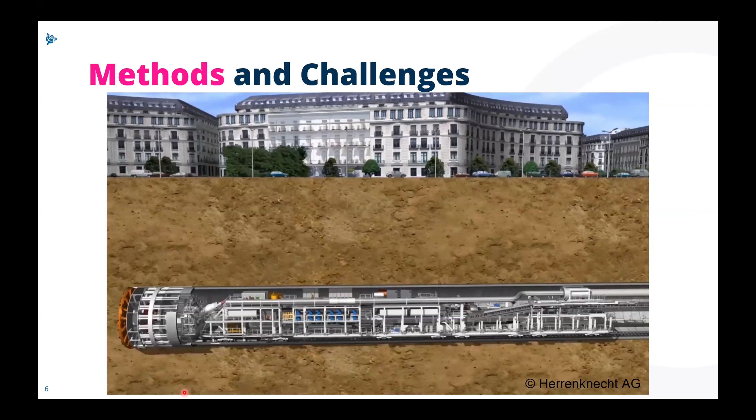Not everybody knows how a tunnel boring machine works. So here's a nice short animation from the manufacturer of tunnel boring machines, Herrenknecht, which is actually the mother company of VMT. The majority of these tunnel boring machines also have the VMT system on board. Just to get a little insight here, this is a 12-meter machine, 40-foot diameter, excavating through the ground.

It's a little bit like a little factory. What happens here: the cutter head in the very front of the machine is turning, excavates the material, the material gets extracted from the underground while the machine is pushing forward. And then behind the machine, you're building these called rings with precast tunnel segments.

And for sure, think about a subway project. You need to put a track into the tunnel, and you need very tight tolerances. That also means it puts a lot of pressure on the surveyor - not just when the machine comes out of the ground for breakthrough, where everybody's waiting and the surveyor's heartbeat is the highest, but also while you're tunneling, you always want to ensure the machine remains properly on line and grade.

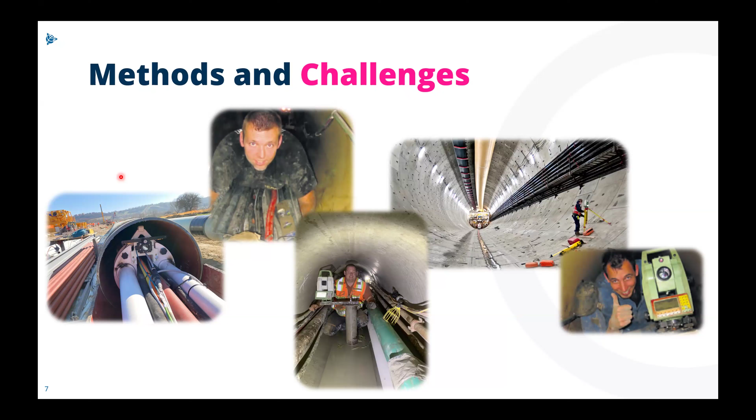We have sewage tunnels, 4 foot, 1.2 meters ID, and then up to 500 meters, 1,500 feet long, or sometimes even longer. So contractors also like to push the limits. The machines can do more and more, but what can you do as a company to not just keep the contractor happy, but also keep your own people happy, so that they in the future don't need to crawl into these tunnels anymore, because it's also not getting easier finding the people to do this work.

A little bit of background about VMT. As I said, over 30 years now, and I am working in the US taking care of the business here. We have a group mainly focused on tunneling projects, but at the same time we have a metrology team that's also involved with car manufacturers, airplane manufacturers. I call them the sub-millimeter team because they work with laser trackers and have to work with sub-millimeter accuracy.

This is not necessarily needed in tunneling when it comes to the TBMs, but there are precast segments being used which in tunneling have tight tolerances, where our team from metrology is also involved.

Different methods, as I mentioned - TBM tunneling, micro tunneling. Micro tunneling doesn't always mean just small diameter, it's just the method of how you tunnel. You can have a 4-meter micro tunnel machine, for example - that's not a micro tunnel in terms of size, but in terms of the excavation method.

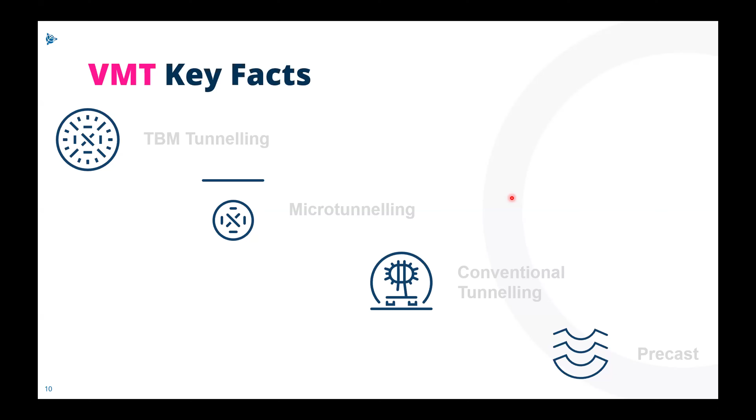And then there's conventional tunnel. Conventional tunnel can be one where you use a shovel. It's still happening that people excavate with a shovel for some short tunnels, because it's the most economic one, but there are other methods - drill and blast, or excavator, or roadheader.

Just a little bit about milestones - I won't go into detail, but we have a pretty good track record with more than 3,000 projects around the world. When it comes to guidance systems, if you're wondering how these systems work, we are basically the Google Maps of these tunnel boring machines. There's no GPS. So how these systems work, I'll show you a little closer in the next slides. But it's not just about the TBM itself, it's also about what's happening behind the TBM.

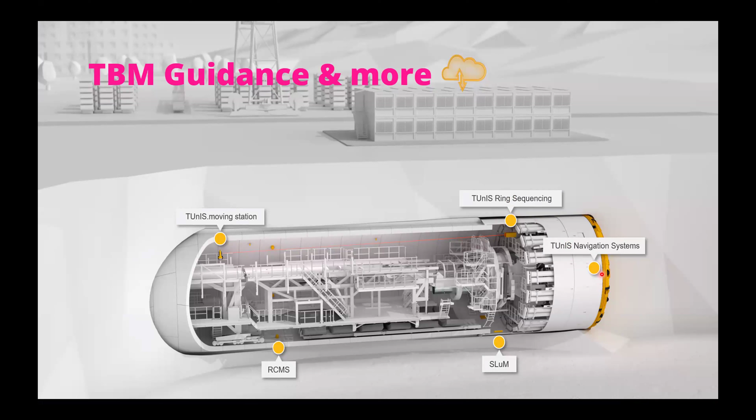Is there any deformation of the tunnel? So we have solutions for this too. And then there are other parameters of the machine that need to be monitored.

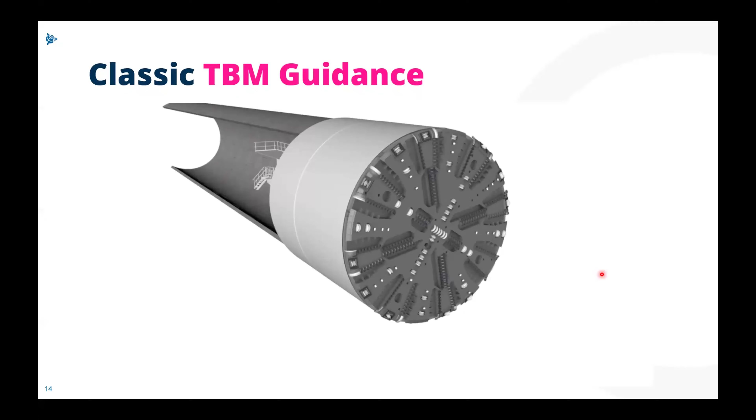So this is a nice animation that shows you how the guidance system works on the tunnel boring machine. It's a total station-based system. The total station is mounted on a bracket in a fixed position. You have a backsight target, and then there's what's called a laser target sitting in the machine. You know the location of this target, and based on these measurements, you can determine the position of the machine.

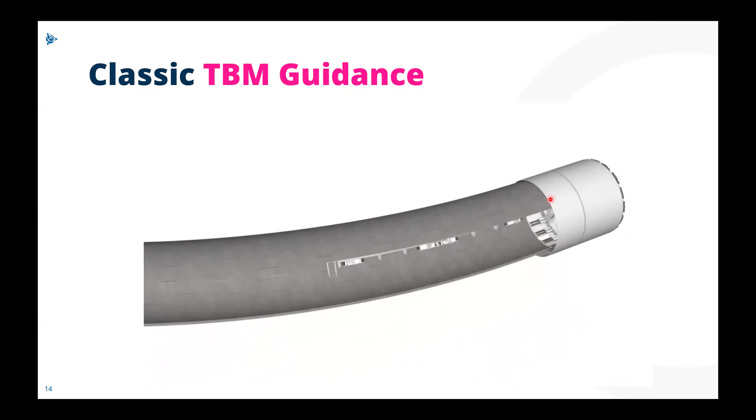And not all tunnels are straight - we have curves, we have slopes. So we all need to take this into consideration when it comes to using the guidance systems.

So a closer look here at a guidance system, call it the classic, where the Leica total station is sitting on a bracket mounted on the tunnel wall, on the precast segment. Here is the laser target unit that's mounted inside the machine.

Here you can see an operator using the VMT system. The operator has a lot of screens, not different TV channels like in the pubs where you see different sports shows at the same time. The operator needs to monitor parameters on the machine, and at the same time have a look at where the TBM is going relative to the designed alignment. There's certainly development toward automating the TBM operation in terms of steering, where we as VMT also contribute to the automation.

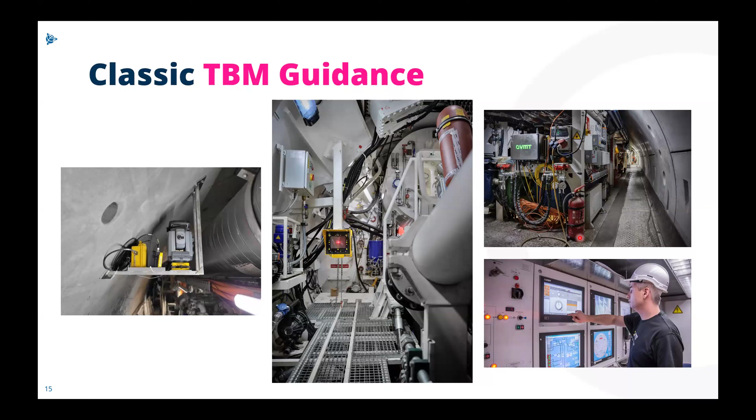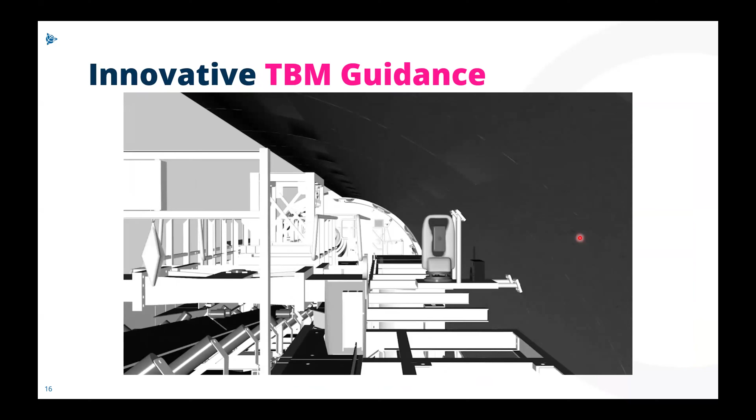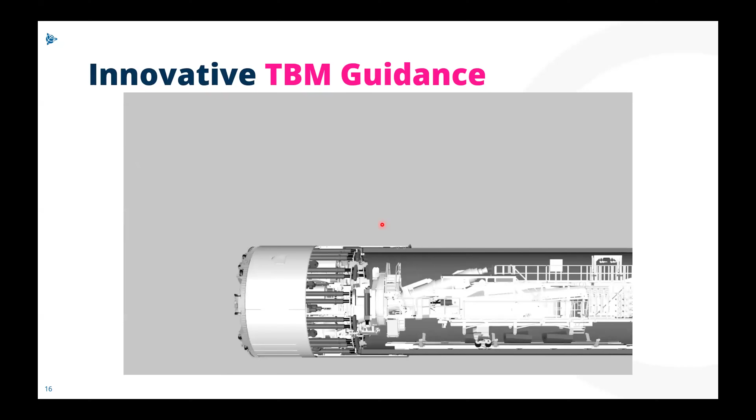Remember, we had the tunnel bracket on the tunnel wall. We also found a different solution for guiding a TBM, a more innovative solution: the moving station, moving the total station away from this fixed bracket and putting it on the actual machine. Then with resection, we get the coordinate of the total station. We have several backsight targets on the tunnel wall, and then measure to the actual target on the machine. You might wonder, how does the total station stay leveled?

For this we have a self-leveler. This is the self-leveler we used in the past. We have now developed our own self-leveler, a smarter one because it also has an internal inclinometer. It gives you direct feedback about what kind of movements you have, so you can analyze better and utilize this information. Also, if you have vibrations on these machines, there's better detection of potential error sources.

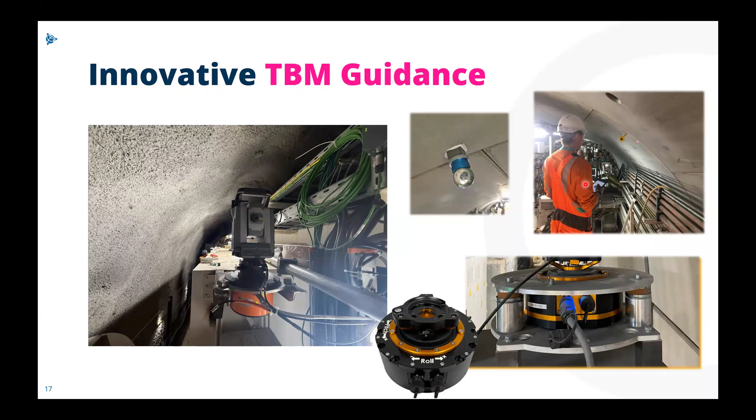The good thing is the surveyor or engineer can use an app on a tablet to control the total station through the VMT system. There's no need, like in the past, to run back into the operator's cab and control it from there. This simplifies the workflow, makes the work easier, and helps with troubleshooting.

So this is what it looks like in the operator's cab again. We're also trying to take these parameters from the machine now. It's not machine learning exactly, because the TBM isn't necessarily learning, right? Machine learning is the phrase used for a lot of topics, but we're trying to get more parameters from the machine that we can incorporate into the guidance system to also calculate the TBM position without, for example, the total station.

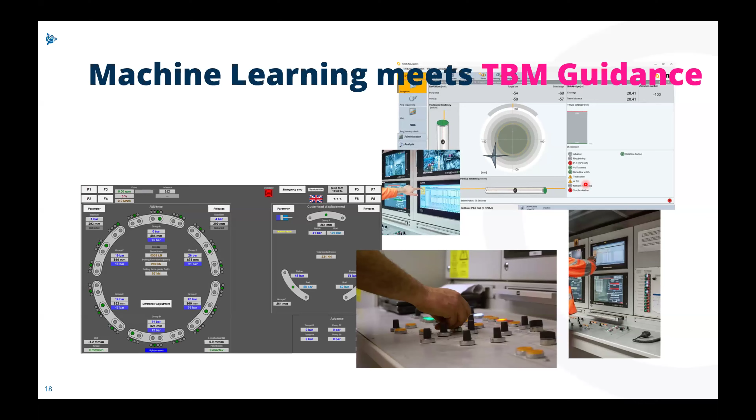For example, if there's no line of sight between the total station and the target, we can still continuously give a position to the operator. We don't want to fully exclude the total station, but we want to ensure we always have a permanent position for the operator, especially in critical areas along the alignment. Imagine going from a tangent into a curve - you want to make sure the operator always has the position available at all times.

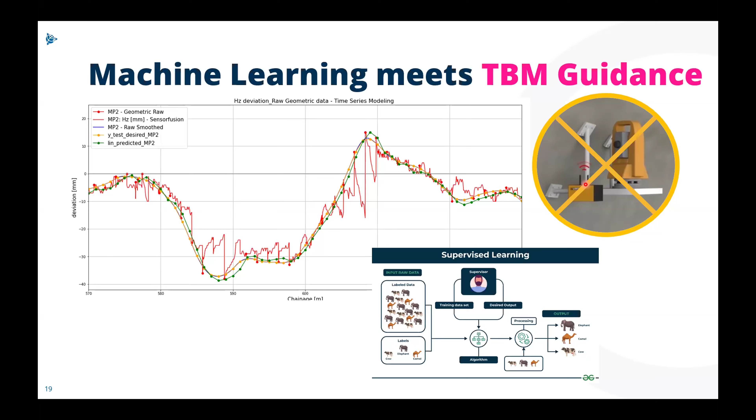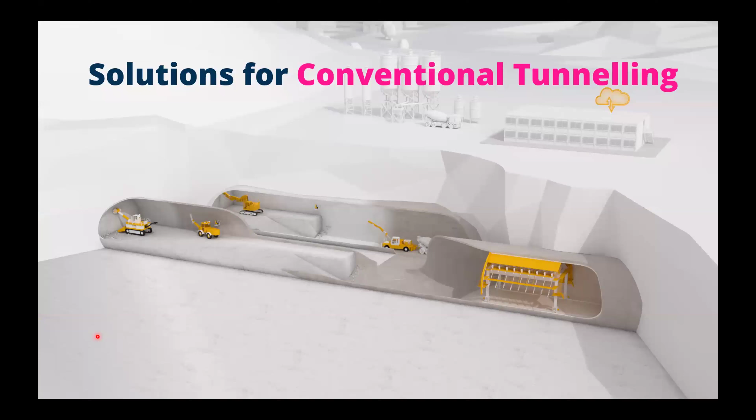So this was a little bit about TBM tunneling, giving you some insight about what's happening with tunnel boring machines. But there's also conventional tunnels where you excavate with a road header - this machine - or with an excavator.

With a TBM you never see the face, the very front of your excavation. In conventional tunneling you always have direct access to the face, which means safety plays an even more important role here, because people are more exposed to the ground and the geology.

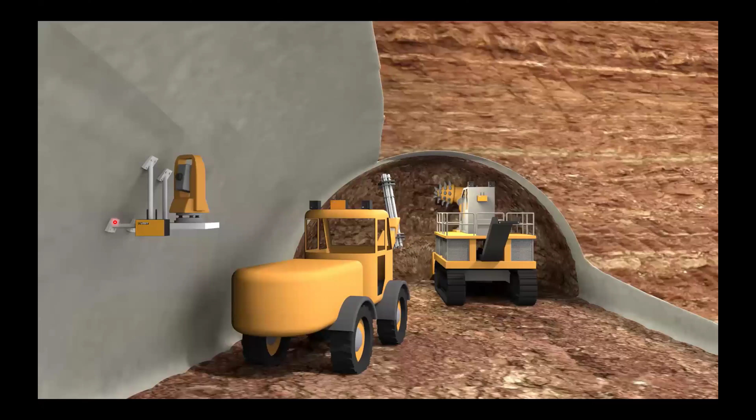In this nice animation, you can see how a total station is used on the road header. You have two prisms mounted on this road header machine, and we know exactly where these prisms are located relative to the center of the machine. So you have a local coordinate system, and the boom in front moves left, right, up and down. We calculate this position continuously relative to the profile they need to cut.

Cutting the profile here is critical because you have tight tolerances - the more you overcut from your profile, the more shotcrete you need to use, and the more shotcrete you use, the more money you need to spend. So you want to stay within tolerances and be as precise as possible.

The total station can also be used at the same time for the rock bolter, which reinforces the ground. The rock bolts also need to be documented in terms of their position - how they were drilled and where they were drilled.

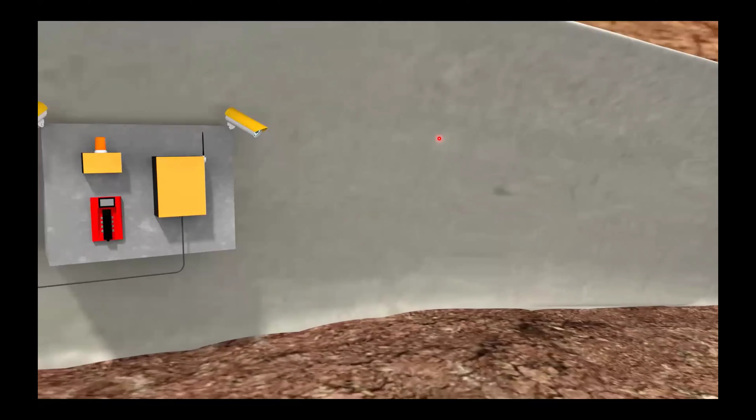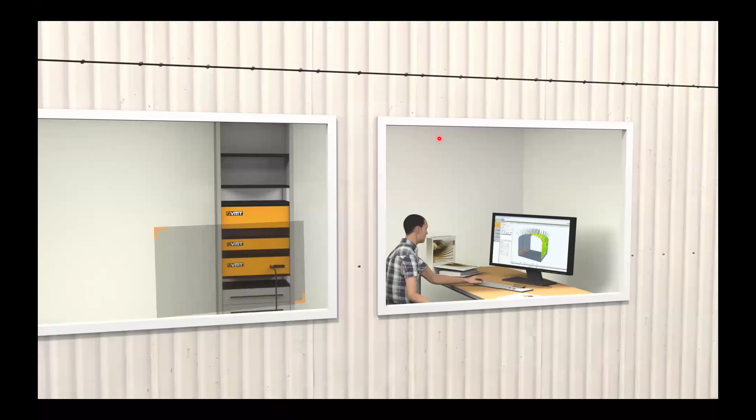The data don't only stay in the tunnel, they're also getting transferred to the surface so that it can be accessed by different stakeholders on the tunnel project, for analysis and also for configuration on the surface. Since the surface is very well connected on most jobs with the underground, you can also do your configuration on the surface and transfer updates directly onto the machine.

There's no need for people to take a pen drive, walk down, wait for a man basket to be lowered into a shaft, and then walk another 2 kilometers to a machine to update the data. This can be done directly in real time from the surface, which is absolutely great. It also makes the surveyor's life easier, because surveyors have a lot of other topics to do, and you don't want to spend several hours just walking to a machine to transfer data.

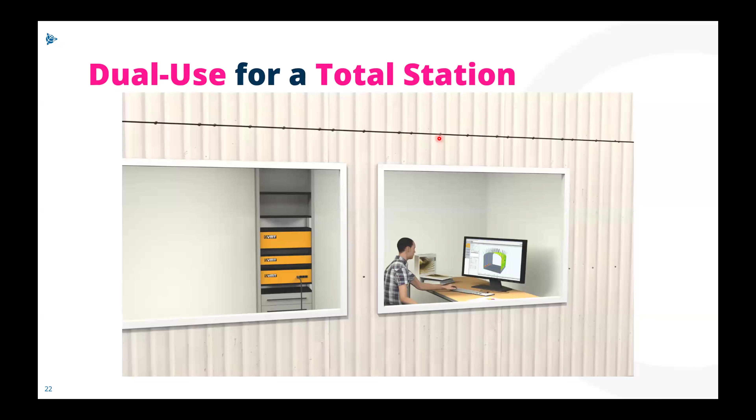As mentioned before, we're trying to share the total station for different applications in this conventional tunnel. It really depends on what is being used here. Since you have one combined system from VMT, the systems can be used on different machines, which simplifies the process because these machines can directly connect to the total station, since they're normally not all working simultaneously, it's a cycle of how they work. You start with your excavation, and you maybe have your rock bolter, so whatever machine is close to the face will use the total station mounted on the tunnel wall.

With the shotcrete rig, you use the total station to georeference the scans so that you have a full georeferenced scan which can be compared to the design. That's quite important for the shotcrete application, because you need to see exactly what was your excavated ground, where you've overcut or undercut, and where you need to apply more shotcrete to be within your tolerances. It's not just about the thickness. Some jobs also use the shotcrete as their final lining, where it becomes really important that you stay within the tolerances.

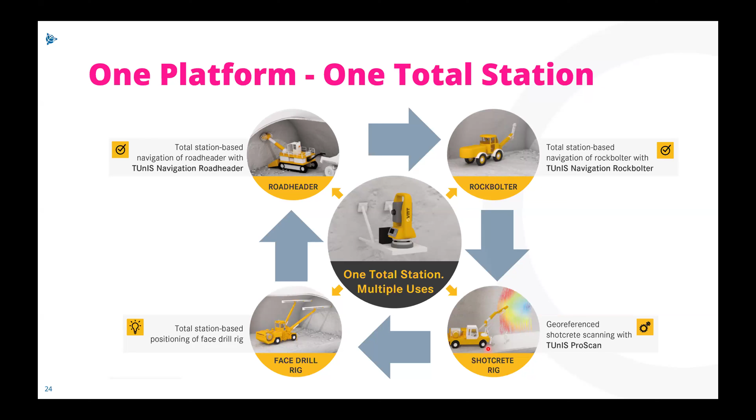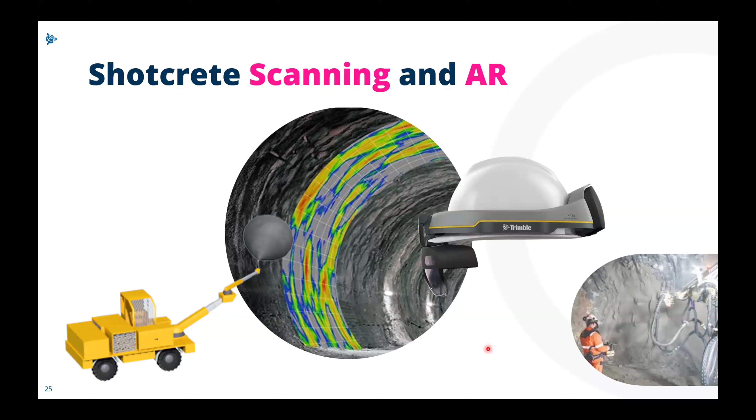We also did some use cases with the Trimble HoloLens, where we try to visualize the results of these scans onto the HoloLens. Unfortunately, Microsoft will discontinue this product, which will also result in a change for us, so we'll see what comes after. But it's an interesting case for an operator, that they can wear the helmet and see in real time, by turning their head, where to apply what type of or how much shotcrete based on the scan results.

Shotcrete is one option for lining in tunnels. Another option is using formwork. Some jobs are struggling, like these 3 people here, to place this formwork in the tunnel relative to the design. This can be quite an iteration, a long process, sometimes of going back and forth between measuring, getting the results, then deciding how much you need to move this formwork left, right, up, or down.

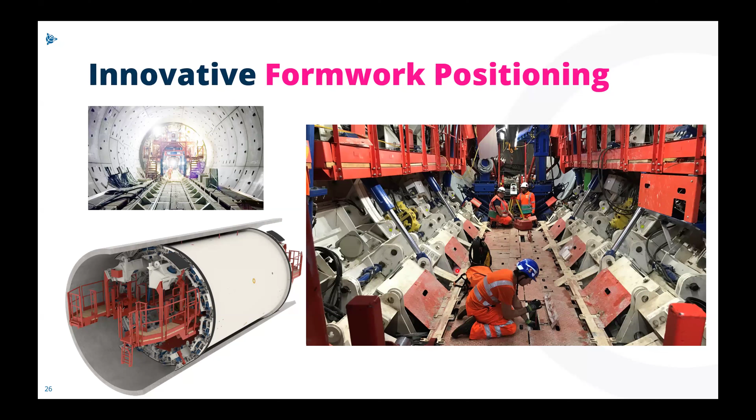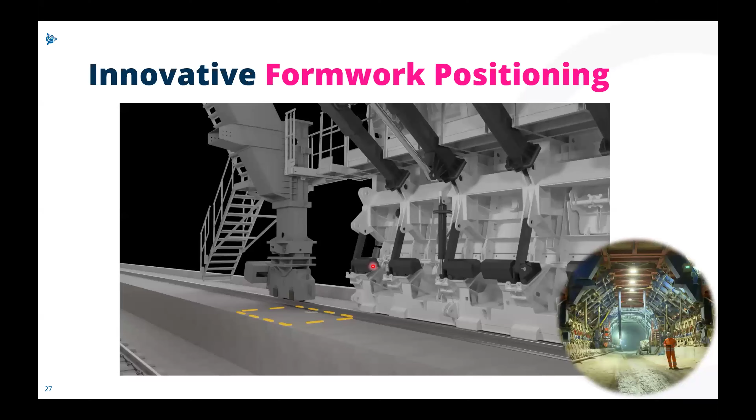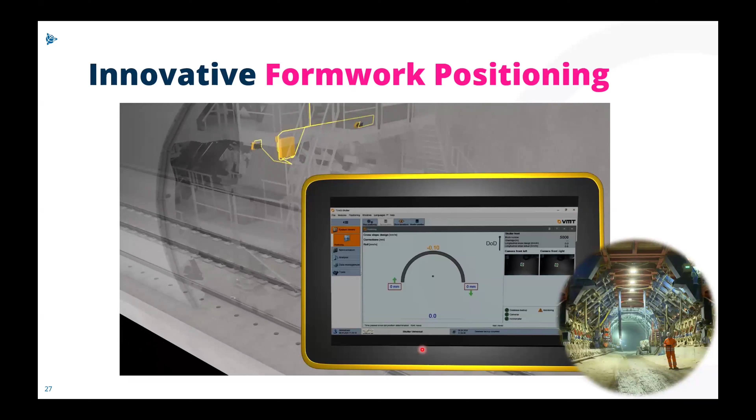For this application, we also have an automated solution now which simplifies the setup of these different kinds of formworks in tunneling. This is also like a guidance system for a tunnel boring machine. In this case, there's no total station involved, but you're setting up markers that are surveyed by a surveyor on site, and then the cameras here detect the marker. We know exactly where these cameras are located inside this formwork, and based on the results, the operator gets the position of this formwork relative to the design, and can then decide how to move the hydraulic jacks to bring the formwork's center line and spring line exactly onto the alignment in the right location before pouring the concrete.

It's not just about placing the formwork, it's also monitoring the position of the formwork while you're pouring the concrete, because there can potentially be movements. Think about a surveyor continuously monitoring, coming back down and shooting while they're pouring - this can be quite an endeavor in some cases. In this case here, you have a continuous recording of the position, which is directly transferred into reports, where a contractor can go to the owner and say, look here, we had no movements, minor movements, everything went fine during our concrete pouring process.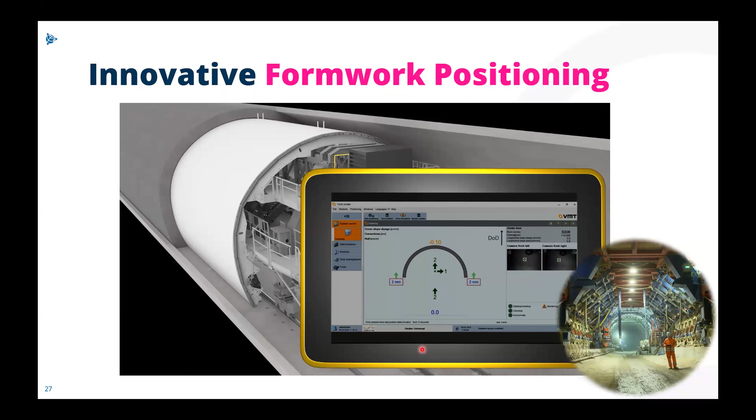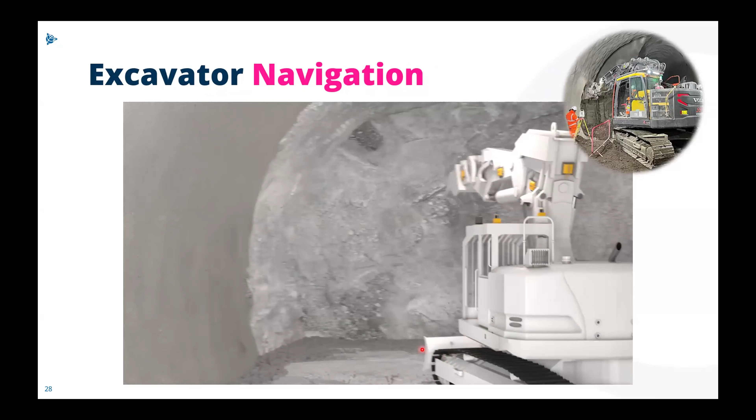Back to the excavation, excavation with an excavator. You know all the machine control, great machine control from Trimble for the surface. In the underground, it's a little bit different because there's no GPS, so it's a different environment here.

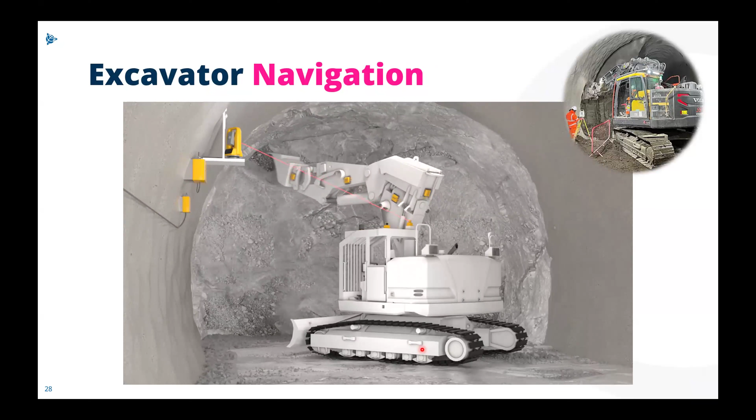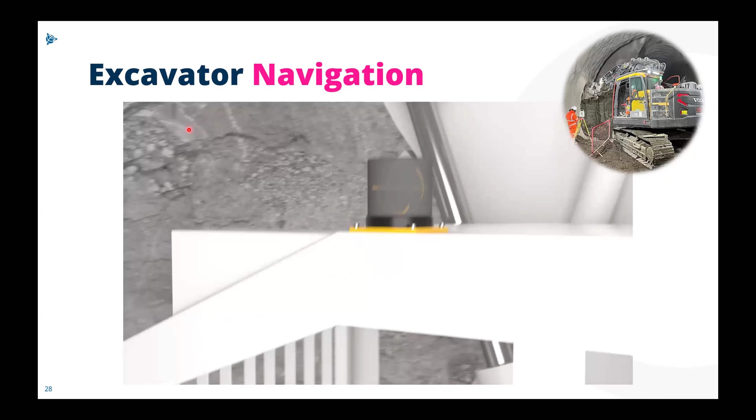Again, using a total station mounted on a tunnel wall, we have two prisms, and then there's an additional device to get the slewing for the excavator, so that you can have this position as accurate as possible. We're also talking about accuracy of less than 10 centimeters, which is quite crucial when it comes to cutting a profile with an excavator in tunneling.

The operator also sees on the screen directly in real time where the excavation tool is relative to the profile. That's quite important, because normally there's a surveyor close to the face, pointing a laser, measuring, giving feedback to the operator. That's not always the safest environment, and it's also not always the most efficient way to do it. If you have an automated system that doesn't always require the surveyor to be there, that's a great option.

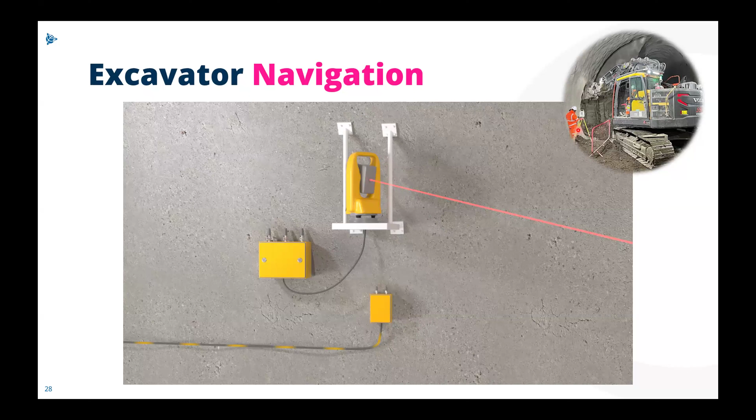And it's not about taking away the work from the surveyors. We're facing times of workforce limitations, and on these tunnel jobs there's so much more work to do for surveyors. That's why it becomes quite crucial to have more automation in terms of guidance on these kinds of machines.

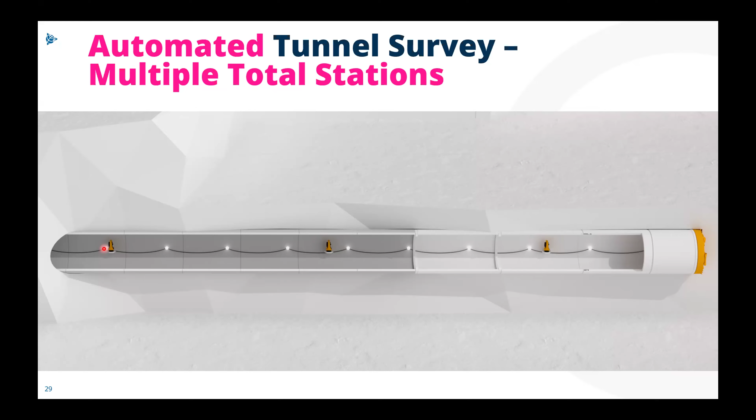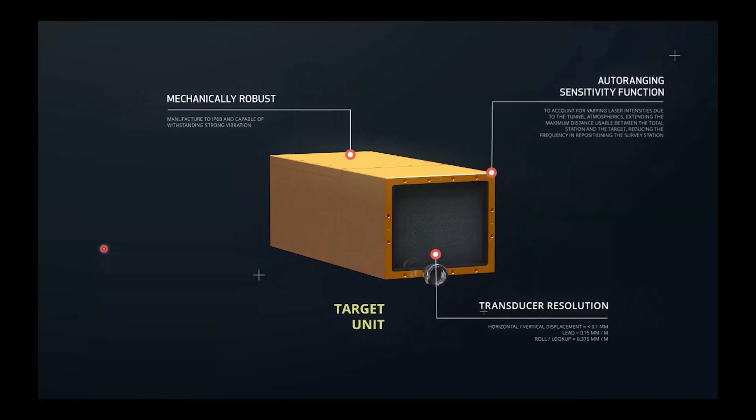For a smaller diameter tunnel, one of the last applications I want to mention is multiple total stations. The idea is an automatic traverse measurement utilizing total stations - a little bit of an older animation. These total stations measure each other, with prisms mounted on top. They measure to each other and do an automatic traverse measurement, which is needed not only to calculate the position of the machine continuously, but also for surveying purposes in terms of updating a machine position.

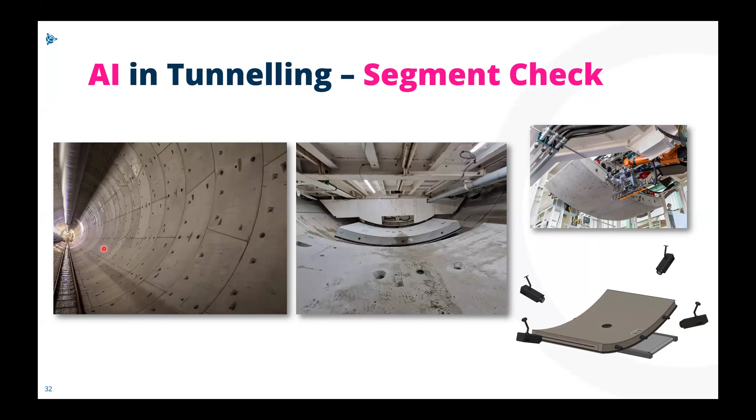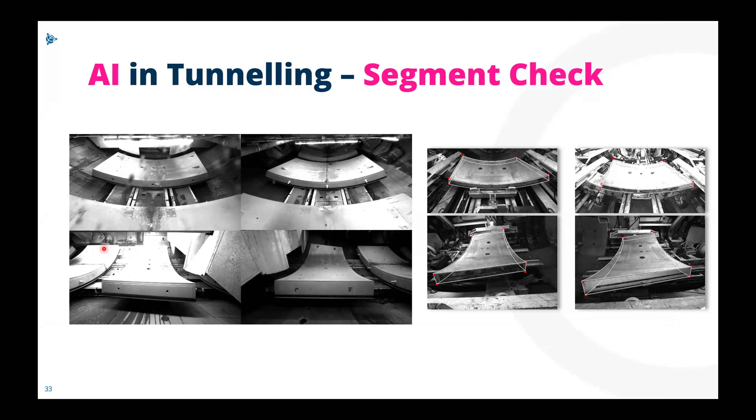The last use case, a little insight using AI. The AI here is not necessarily used for measuring, it's more for detecting the quality of the segments - these are the precast segments used to build a tunnel. You use several segments, put them together, for example 6 or 7 segments, and then they create one ring that's used to protect yourself from the ground and also push the machine forward. The AI automatically detects the segments, making sure the quality of the segments delivered on this tunnel boring machine fulfills the requirements.

Just another case to show where we use AI already, and for sure there are more topics to come - also in terms of analyzing data automatically that comes from a tunnel boring machine, from a guidance system. This takes away some additional work where people are sitting and digging through data, and lets us put some more automation into this, because our time is valuable for other topics, and we should not go through a bunch of data if there's some sort of solution out there that can do it automatically and tell you whether there was a problem or not.

Yeah, this was generated with AI. As you can see here, there's a problem in some areas with the graphics. This is how AI still is nowadays - you cannot fully rely on it, you still need to use your brain, but in this case it was the easiest and fastest way to give a little bit of insight.

For sure, the goal at the end is bringing everything together, streamlining the workflow on tunneling jobs with different solutions. In the past, there were always little islands not communicating with each other. Now it's time to bring the data more together so that you, as a contractor, a surveying company, or an owner, can make better decisions, faster decisions, by using the right data. And I would say I hand over to Riley.

Awesome. Even though it's not the first time I've seen this presentation, it makes me excited every time. Some great things that VMT is doing. And we make boring exciting again.

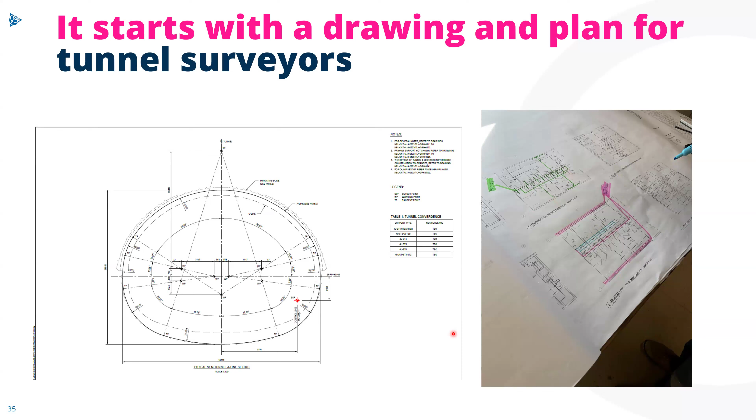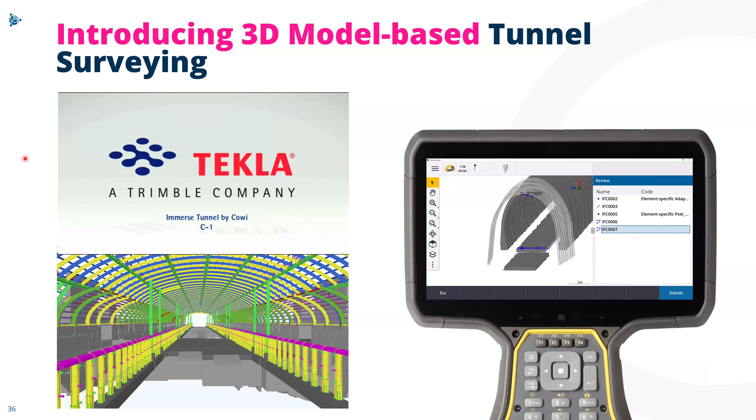But what I'm starting to see change in the industry is these more complex, more detailed models. For example, I'm showing here in the video one produced from one of the Trimble softwares, Tekla, for doing civil and structural design, creating these very detailed models, not just from a 3D geometry standpoint, but also the information in that.

So surveyors have to take that and turn it into a usable survey-ready deliverable, which is different from using points and lines and coordinates. A lot of what Trimble's been developing is how to take that information and make it ready to use for survey needs in the field, like you see on the right-hand side with Trimble Access, where we've implemented 3D models so you can stake out directly to that.

But okay, that's one thing. We have the ability to use that data, but a lot of the time we're still transferring files manually to site. We're using USB keys, and a big shout out to the folks at Frontier Precision for this great video on how to do that.

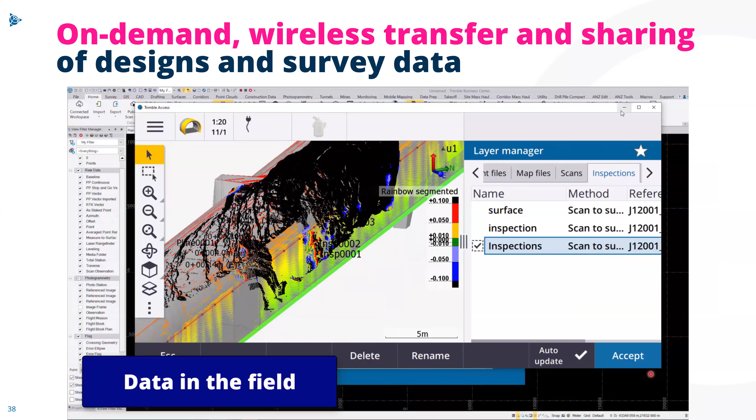But the industry is changing. We have a lot of crews on site. We're getting design revisions really fast, and we've got to turn around and have the latest information. So we're making sure we're using that in the field to stake out, to set out, to guide, whatever the workflow is. One of the workflows we built is this connectivity between the field and the office through Trimble Connect as a common data environment, to take that latest design information, get it to the field, or even get it from the office, and vice versa.

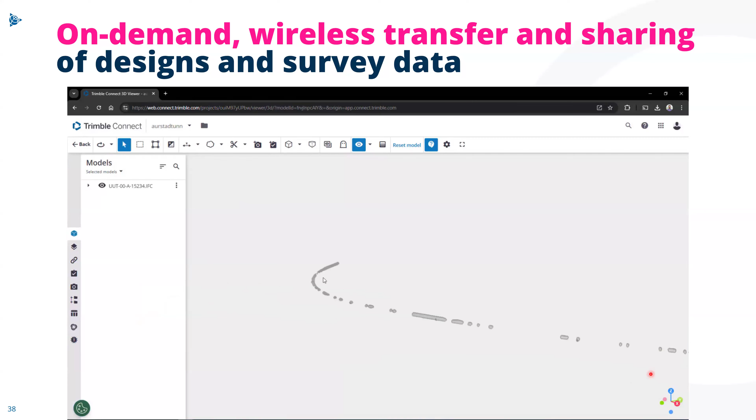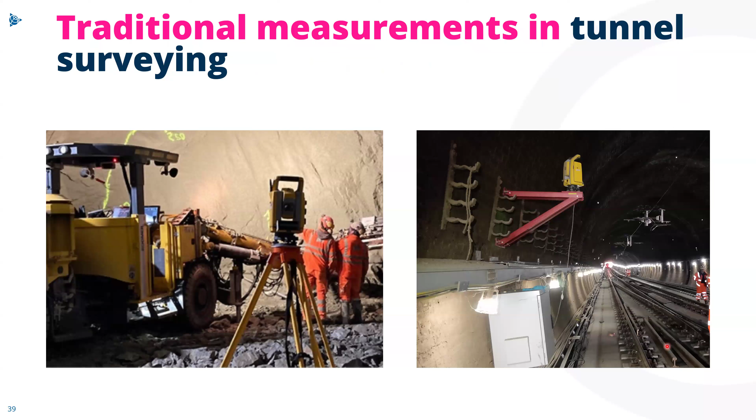So in this case, I'm showing a design, but it could also be field data from the data collector into the software for processing, making sure we have the latest information so we can turn around deliverables in a more timely fashion. And then there's a lot more of this traditional, conventional approach to measurement with total stations, and that's not going to change. It's still a high precision instrument used in your control networks and monitoring and a variety of things, as well as guidance, as Matthias was showing.

But one of the changes I've seen is adoption of reality capture information to do the conformance checks, to do the validation, whether it's shotcrete, TBM rings, or a variety of other things. Okay, well, reality capture isn't new technology. I'm sure many of you are out there familiar with it.

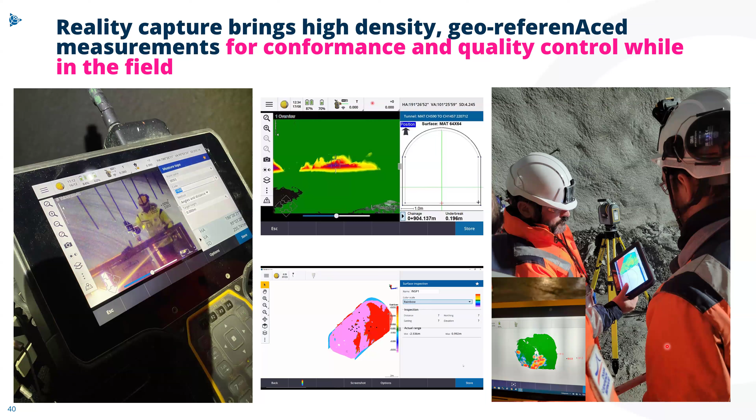What has really changed is the ability to use that while you're in the field and get some insights. For example, getting real-time shotcrete checks while you're standing close to the face, doing a scan and checking for things like thickness and a variety of other parameters. I think you'll continue to see this world evolve as devices and tablets get more edge processing capabilities, get stronger and smarter, and be able to do more while you're there to make a decision. So you don't have to go to the office, process some data, clean it up, and turn around a report, and you reduce that timeline.

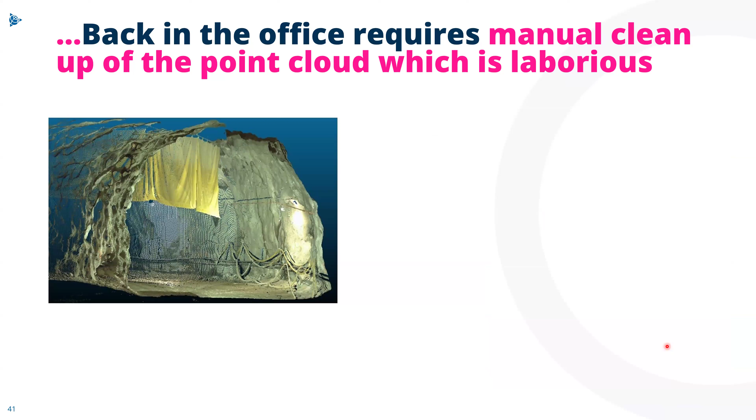But oftentimes we do have to create reports, or put a bunch of point cloud data together and produce a model. And so we're faced with all of this data, but there's a lot of noise in it. You've got millions, if not billions, of point cloud points, and you've got girders, ductwork, cabling, people and machines. That takes a lot of time to clean up. And I don't know about you, but typically that's one of the things I don't want to do is sit there and manually segment out all the point cloud data from that scan, because it'll take a lot of time.

So we also invested a lot into automation of cleaning that data. What I'm showing here is a deep learning model that we've developed to automatically detect different features within the point cloud, to reduce the amount of manual segmentation that somebody has to do, so you can get faster to whether it's scan to BIM, scan to report, heat map, or any other deliverable.

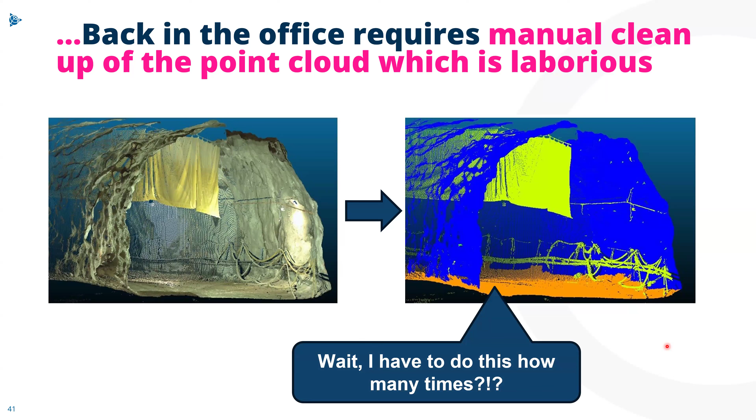Here's an example where we've taken the scan and automatically extracted the rock surface, the ground or floor and the shotcrete layer, which you can see here close to or further away from the face, and even extracted the rock bolts in that scan. So quite a bit of detail. And while there's still a lot more we can do to continue speeding up this workflow and removing other manual steps, this is a great first start of reducing the amount of data cleanup you have to do in the back office.

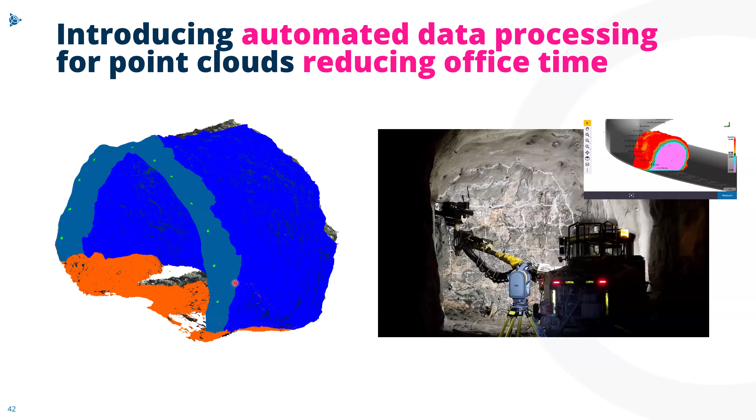As Mathias showed, there's also a lot more move to prefabrication, not just from the TBM side of the world, but other components that may be in the tunnel after it's been built, and you need to validate those things. So there's a lot of capability to now leverage the rich 3D model and use the scanning capability to validate that. Now, maybe you might need higher precision in certain cases, and maybe laser trackers or things, but I think this allows you to get more out of the tools that you have at your disposal today.

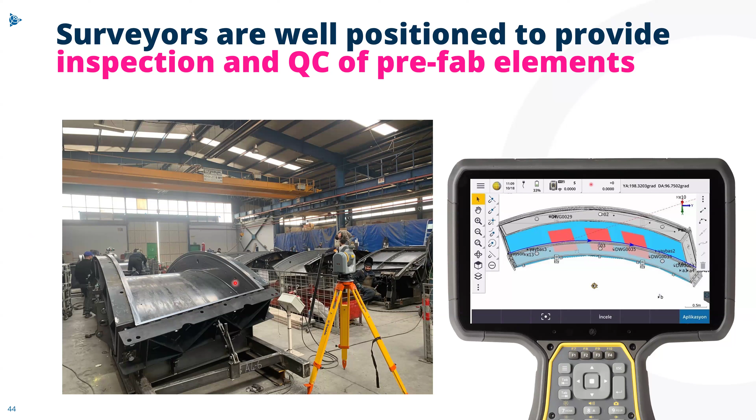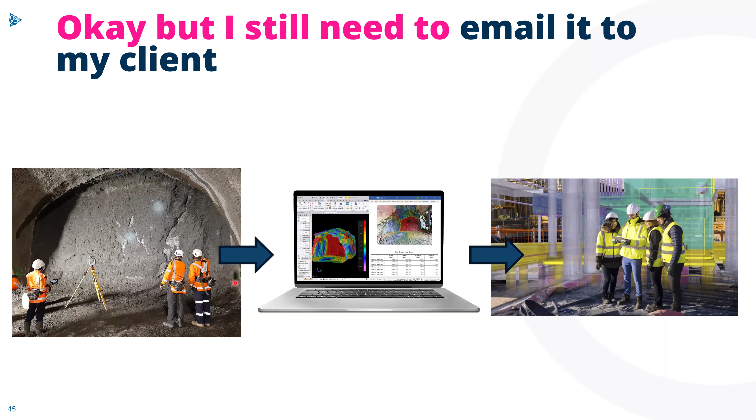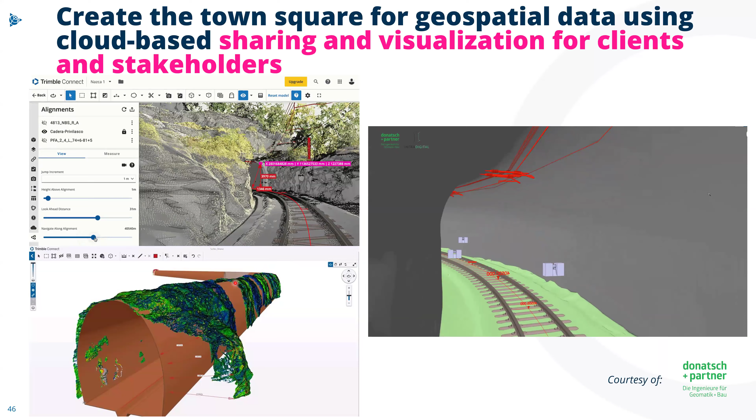Okay, so how do we get that data, those reports, that information to clients, to stakeholders on the project? We've got great data, we've processed it, turned around reports and so forth, but typically that's not where it ends. It goes somewhere, it goes to someone, even if it's just for archiving. This is where we've introduced more of what I like to think of as the town square for geospatial data with Trimble Connect - a place to manage and store both your geospatial data and the latest design information, allowing dissemination to stakeholders and also to the survey team for what they can use.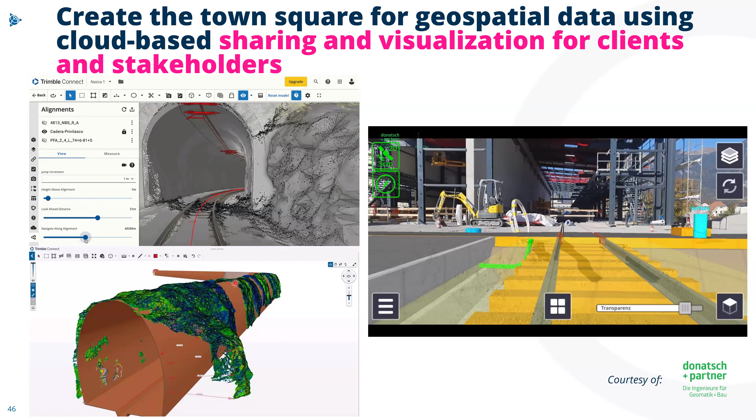There's also additional collaboration and visualization tools, like alignment-based visualization, measurements, annotation and so forth. That allows collaboration between stakeholders, and they're not necessarily just using a PDF report as the only means of doing that. So I hope that gives you a broad overview of the workflow.

But one of the other things I've heard often is the workforce challenges, right? New tools, new workflows, new technology that comes out, and how to keep the team up to date. One of the things we've tried to do from a Trimble perspective is use the Trimble Learn platform to introduce courses and material that you can use with your crews and office staff, to get them up to date and know that they have competency in the workflows they need to be doing. And I know this can be a challenge when you have a big project that starts up and you're mobilizing a workforce, and getting them up to date and trained is a really big challenge.

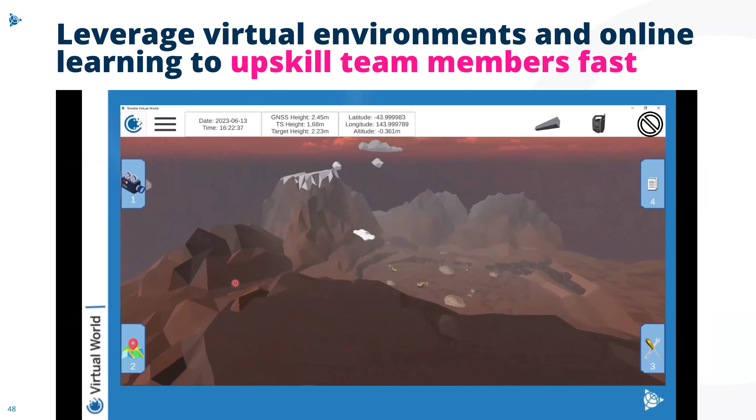So this platform, I would encourage you to take a look at learn.trimble.com and see a lot of the content that's available for your teams. But there's also different interactive tools that can help experience the site without actually being on site, which can be quite interesting if you have team members who are new to tunneling. As we know, it can be a challenging environment if you've never been in the underground space.

And so kind of teaching some of the principles in an interactive way so that they're more prepared when they get out there. They have to do control surveys or they need to get to the face and do a scan. They've got some more ideas of what they need to do on the technology when they're in the field. Perfect.

So hopefully that gives you some ideas of some different ways you can explore updating your workflows and looking at ways to streamline some of that. So Matthias already talked a bit about looking into the future and some of the things that we see changing, and from a technology standpoint, how we can update those.

I do also want to cover why we're doing this webinar today. Well, one is to educate everyone and provide some content and learning for all of you, but also Trimble and VMT are working together to hopefully bring more value to our customers and our users in the industry who are using our combined technology on projects.

So some of the ways that we're doing that is, we've obviously seen in some of the pictures, Trimble total stations are supported with the VMT TBM guidance system. So if you are using Trimble total stations to do your surveying, you can also use the same instruments with those guidance systems. And one of the other components that I've seen often is the surveyors, as Matthias said, which I really appreciated, are often first on site.

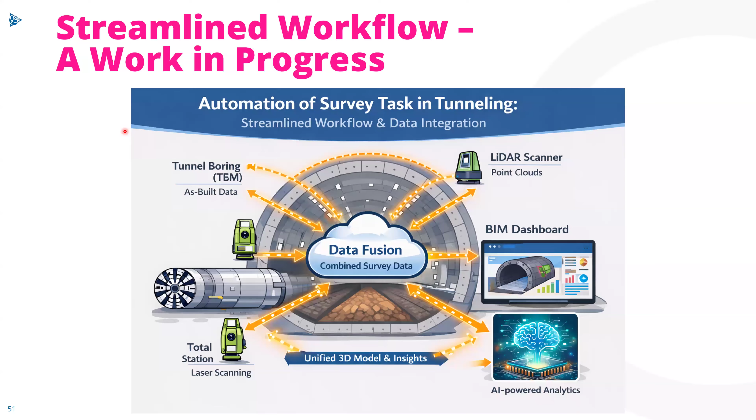In the VMT software, now you have a change in one software, you need to do it in the other one. So in VMT, it makes it now easier with the Trimble - we can import the data. We found a way how we can easily get the data transferred and then import it into VMT, so you always have more or less consistent data.

For sure, in the future, I hope there's also a more automated process so that we always have the right data available. We have seen in the past that people have different kinds of documents about alignments, and then all of a sudden you find out that the machine is offline because somebody has never updated the alignment on the tunnel boring machine. These things need to be avoided so that you have consistent data across your different platforms.

It's not an easy way to do. It takes time, like it is in tunneling. It's just most of the time a steady progress. Sometimes you have to stop for a little bit, but at the end we have a goal. We have to work on this, and it's a matter of time that things will get easier.

But also you as a contractor working on a daily basis with this stuff, we are happy to get your feedback, your ideas, your wishes, because at the end we live also from you, because we make the products for you. So your feedback is really valuable to us. That's why ideas, questions - we have more of those now in the Q&A, I would say.

Casey, looks like there's an agreement with that statement around managing designs through multiple systems - multiple guidance, CAD, survey software, all of that. I think you answered it really well there, Matthias. We're making progress, but there's still work to do to try and make some consistency and maybe some automation as well, so that between machine guided systems, CAD, survey, all of that, we're running on the same information.

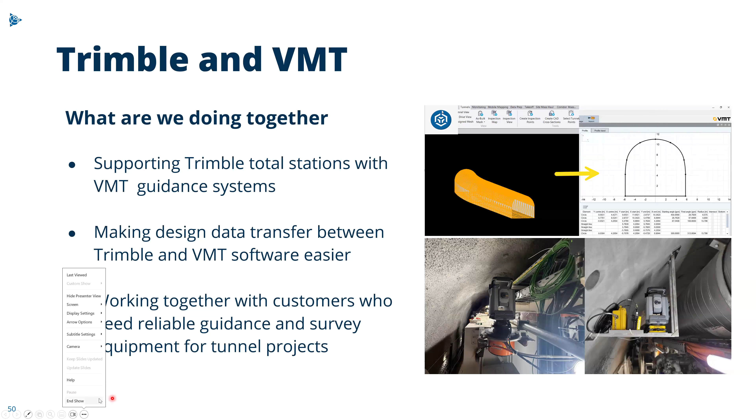It's really where your profile sits relative to the design, and whether what you are cutting fits and matches the tolerances.

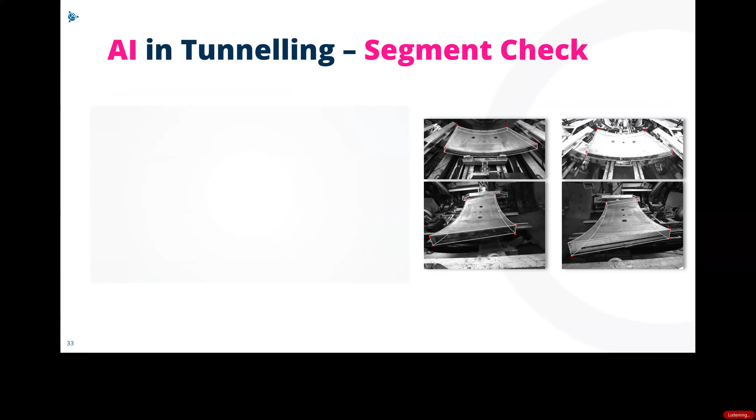So this about the road header excavation. Maybe you're talking about using a hammer on an excavator. Not 100% sure if this is correct, but at the moment we are more using excavators with other excavation tools. You can even have a road header, a drill head mounted on an excavator, or a bucket for excavation. A hammer, in terms of accuracy, is not the best option for a guidance system at the moment, so that's more limited cases. If you use a hammer on an excavator, it's also maybe not the right ground for an excavator with that tool. And for rock bolters, utilizing the total station is similar.

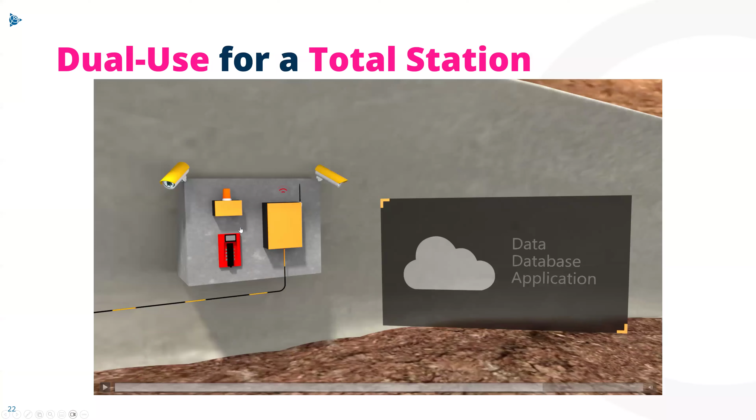I think that was a great answer. So another question, on the auto level - what is the model name and data logger capability for that smart auto level you showed? Let me see if I can find it on the slide. Thanks for going through this. It's called the TPS level.

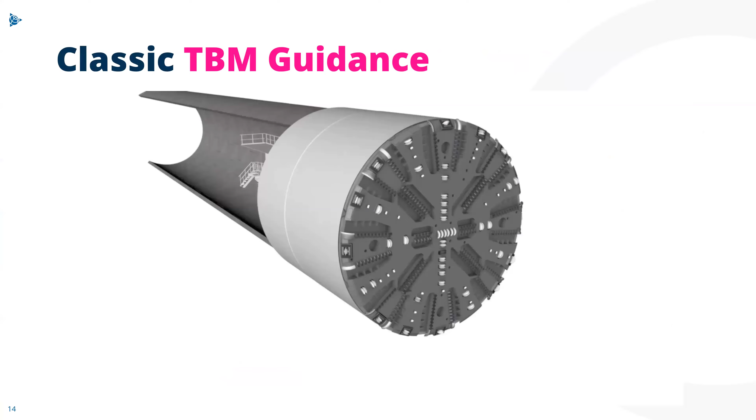And that's a VMT development. Before we used a device from another manufacturer, but we wanted more control on our side. In terms of data logger capabilities, right now we have roll and pitch, so a 2-axis inclinometer implemented into this, which with an additional device will give us insight about vibrations, so it gives an idea of what is really happening on the self leveler. Before, the self leveler was just - don't get me wrong - it was just not a smart component. It was doing its thing, it had an LED on it telling you it was leveled, but you never really had an indication if there was movement at the location where your self leveler is. Now with an inclinometer, you can have data logged and a timeline, and see how the data changes, which gives indication on a monitoring project, for example if you want to utilize it to see if you had movements on your post related to weather, or if the post got hit. Because if it always stays leveled and you just look from far away, you don't know what happened there. So for us, the data logging gives more information.

I think I'll take the next question, but I'd be curious to hear your thoughts too. So the question is from Germain, I think, around how drones could play a part in tunneling in the future. I think the short answer is we're starting to see some interest, at least from the geospatial surveying world I live in. There's also an element of adoption, safety, and regulation - understanding the ways we can use those safely as part of the tunneling process. But drones are getting much better at detection and autonomy in their systems and payloads, so there's some great ways we can leverage that.

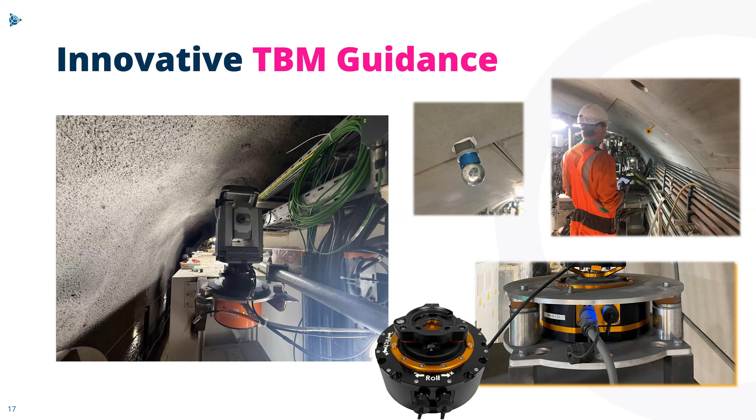The total station is first of all only used to position the road header itself. Let's say assume the main body, and then you still have the boom, which is mounted onto the main body, and then it's moving horizontally, vertically, and in some cases they also have what's called a telescope where they can extend it longitudinally along the boom. To get the actual boom position, this information comes from sensors on the boom, and we get the total station measurement to these prisms.

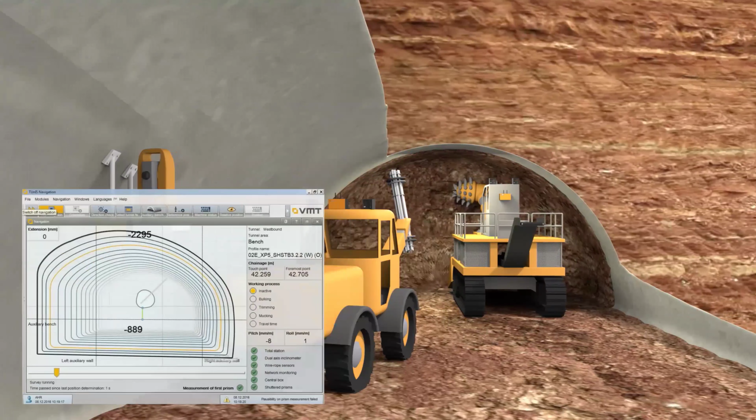Thank you for the animation. This is the only thing where the total station is involved, so that we get this main position of the road header. And then from here, we are using sensors in the boom to get the horizontal, vertical movement and also the telescopic movement, so that we can continuously, in real time, display the position of the excavation tool relative to the design profile. And also you have wear on these picks, it's called, on a road header.

Sometimes it's even important to keep in mind, when you have projects with really tight tolerances, you have to take into consideration the wear on these picks too, so that you sometimes even have to update the design of the excavation tool. So that's also quite important for the job where they changed the actual design of the excavation tool but didn't change the setting in the software.

And then later on, they were cutting the profile, everything looked nice in the VMT. They did the as-built survey and had an overcut, because they found out that they eventually used a bigger excavation tool on the road header, which the system didn't know. So this is where a human factor comes into play sometimes, and people need to keep in mind that there's still some interaction between the people who configure it and the actual system.

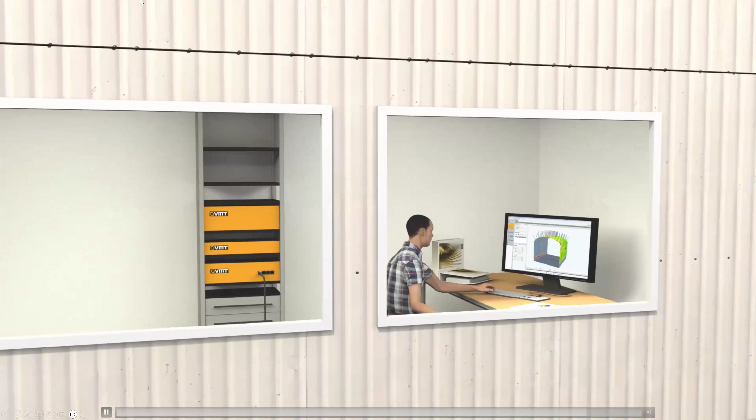How compatible is it? So the system, Trimble Total Station, we have done in the SEM, we have done tests already. Right now we have it mainly used on TBM tunnels. We are looking more into SEM cases at the moment, but the main focus first of all was because the majority of the projects is usually more TBM. So that's why you have to put a focus on this first and see, okay, where are the most projects? SEM, we got the lucky situation in North America, there are projects again, and in Canada.

Australia has been a really big market for conventional tunnel with road headers, for example. But the use of road headers is also limited, because you need the right ground conditions for it. So if you have really soft ground, you cannot excavate with a road header, then you use a tunnel boring machine or maybe an excavator.

Perfect. All right. And then Casey asked, how long has the Trimble VMT integration team been working together?

I don't know how long, but I think this webinar is kind of a way for us to inform and educate all of you, and hopefully more into the future, on these different integrations, and hopefully more to come. What we do is really based on what all of you tell us is needed in the industry and what would help your projects. So I'm hoping to hear from all of you on other things that we could be doing that would really drive productivity or safety or whatever metric it might be on your projects.

All right, more questions around the positioning system. Not surprised, it's a cool system. So the overall 3D accuracy, and I think this is from Chad, so I'm guessing it's around the road header, the overall 3D accuracy is 10 centimeters. Is that, or is there a specific?

Maybe we're getting too close to the end of time, so we'll take one more question and then end the webinar. Next on the list, from Abdul: is the total station permanently positioned? I think he's referring to the case of a guidance system, that's my guess. Let me put up this graphic again.

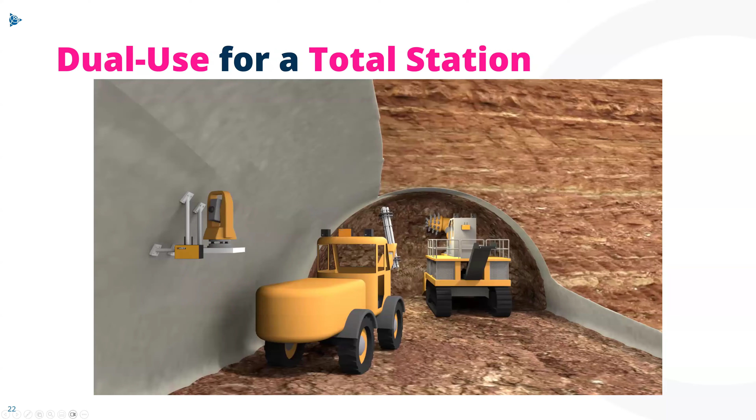I guess this is a good representation here. For the conventional tunnel, you have to move it forward at some point, because as excavation continues, there will be line of sight limitations. There might be dust - on conventional tunnels, they try to de-dust as much as possible. But you might have to move the total station, bring it closer, due to line of sight limitations. I'd say usually not going more than 100 meters before you move it onto a new bracket. Sometimes you even have to be closer. It depends case to case, from job site to job site.

On TBM tunnels, it really depends on how often you have to move the total station, based on the alignment - straight or curves. If you have really tight curves, you have to move the total station more often. This is always the case with what we call the classic mode, where the total station is mounted on a bracket on the tunnel wall. But with the moving station system, the innovative system, the total station always travels with the actual tunnel boring machine.

In this case, it always sits in the same location, on the self-leveling tripod. The thing is, people don't need to take it off or carry it from one location to another. In a lot of cases, especially night shifts, they're breaking the total stations or forgetting to tighten the knob on the tripod, and then somebody hits the total station and it falls down. Everything is possible in tunneling, I can tell you.

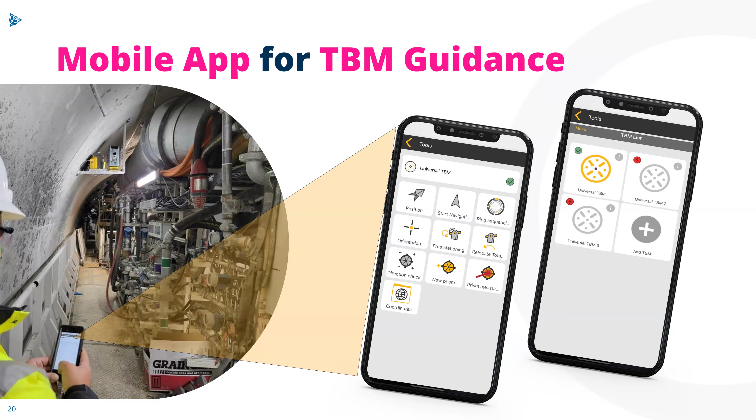I think with that, everything is possible, like Mathias said. So that's a good thing to end the webinar on.